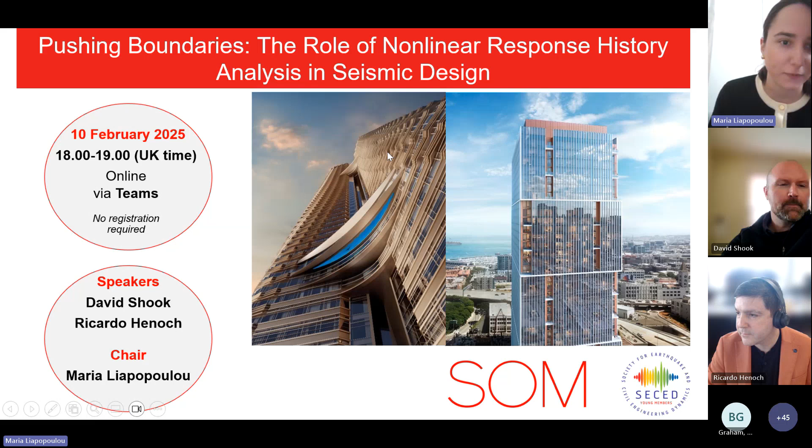Everyone. My name is Maria Liapopoulou, and today I have the pleasure of welcoming you all to our talk with the title Pushing Boundaries: The Role of Nonlinear Response History Analysis in Seismic Design. This is organized by SECED Young Member Subcommittee, and we have today two speakers, David Shook and Ricardo Henoch from SOM San Francisco office.

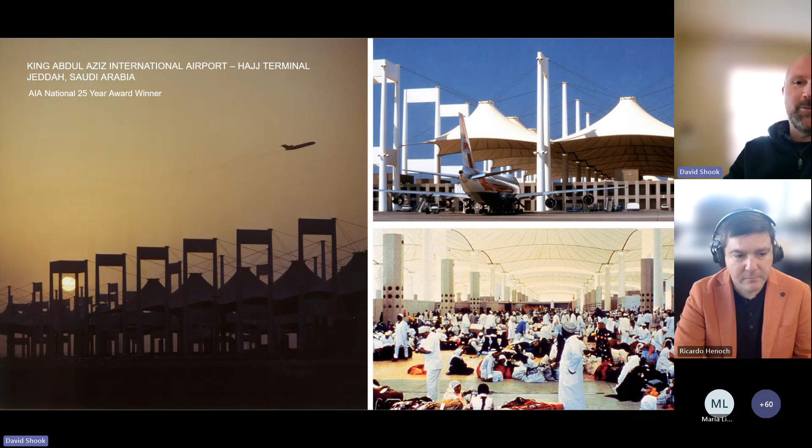This is an airport in Saudi Arabia, of course. This is another airport in San Francisco, and this is a really interesting one that was done when I started at SOM, but its ethos was still resonating within the firm. This was a project that's base isolated, so that whole beautiful international terminal you see there is not possible without base isolation. And base isolation really requires nonlinear response history analysis.

Now, when I was starting at SOM, how to do nonlinear analysis with base isolators was well established. And we were using that. And we were being creative with the structure and the design and how people interact with the design on a day-to-day basis, completely enabled through nonlinear response history analysis in a high seismic zone.

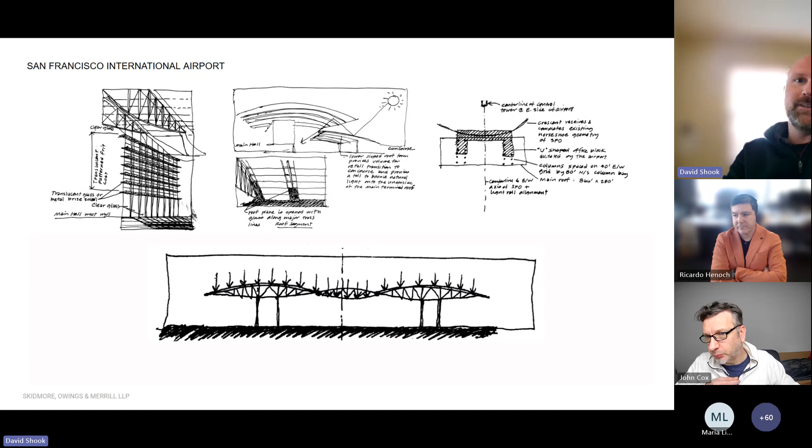Another project, and when I started at SOM, I did the very last RFI on this project. So I like to say I worked on it, even though I didn't really work on it. But it's a beautiful cathedral. It's in Oakland, super high seismic area, poor soils. And this is a very low budget project, okay? And it was going to be something totally different than this.

But we were able to incorporate, again, base isolation and enable a completely new architecture with incredibly low cost. I hate to call the building cheap because it's a beautiful building, but this is a very low cost building for the Oakland Diocese. And it was enabled through base isolation, and base isolation was and is enabled through nonlinear response history analysis.

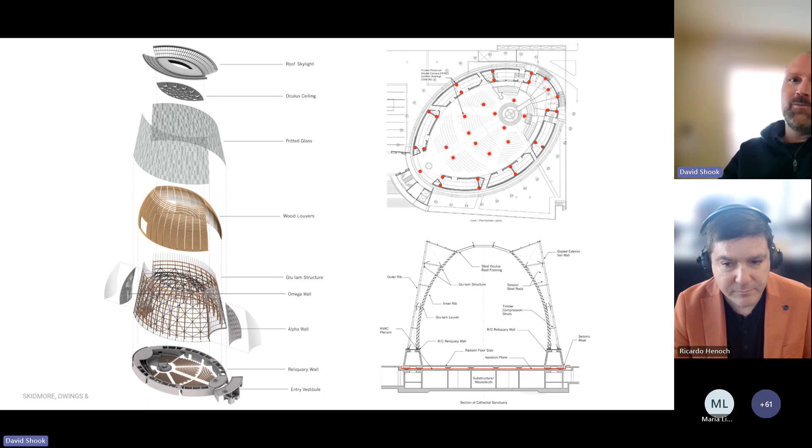So you can't do these architectures, these structures, these beautiful places. Like you can't even tell what the structure is. There's no cladding on this building. It just is. It's the materials that are very honest. So these were very well loved and celebrated within the firm, and we were expanding our creativity at the time pretty much with base isolation through nonlinear analysis. I know I've said it like 20 times.

All right. Coming a little bit more to the current. This is a building that is finished in San Francisco, but it does personify and represent very classic use of nonlinear response history analysis, especially on the West Coast. So the project is 500 Folsom. It's 43 stories.

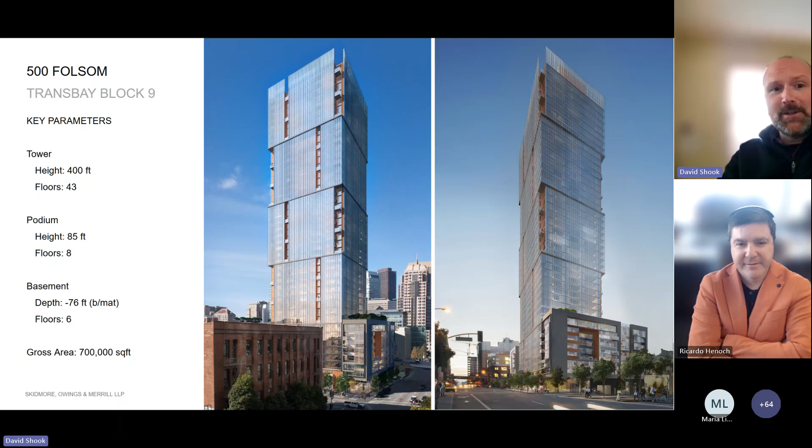I'm sorry, Ricardo and I live in the feet and inches world, but 43 stories, with a large podium, very deep basement, a pretty large building, but pretty conventional in a number of ways. The design was done in a way, and this is just good seismic design. It looks very simple, like what you're looking at on the screen. You're like, oh, it's a concrete box.

That is not easy to achieve. It takes a lot of coordination with the architects. And the best performing structures have the clearest structural concept and execution of that in the design. So this is just a concrete box all the way up and down.

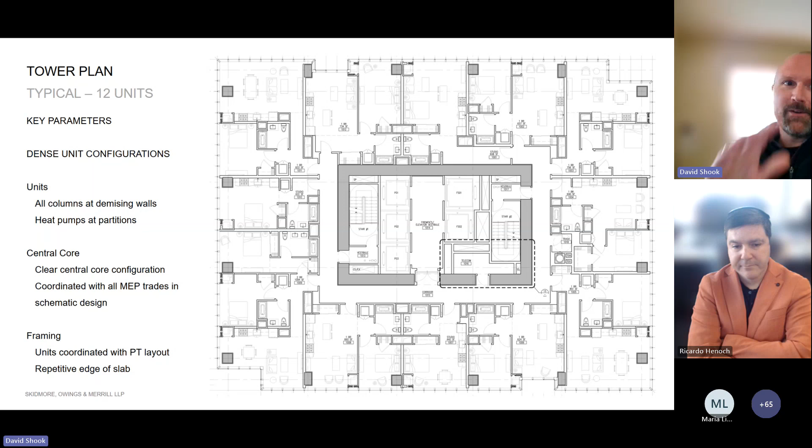Sounds very simple, but we spent a lot of time coordinating elevators, stairs, MEP, because we've got to get those doors to stack. We've got to get the pipes going in and out in the correct places. Because if they're not, they're going to be detrimental to the seismic performance of the building. It's an all concrete building, post-tension floors. Here's just kind of a diagram, kind of layers in the deep basement that goes along with it.

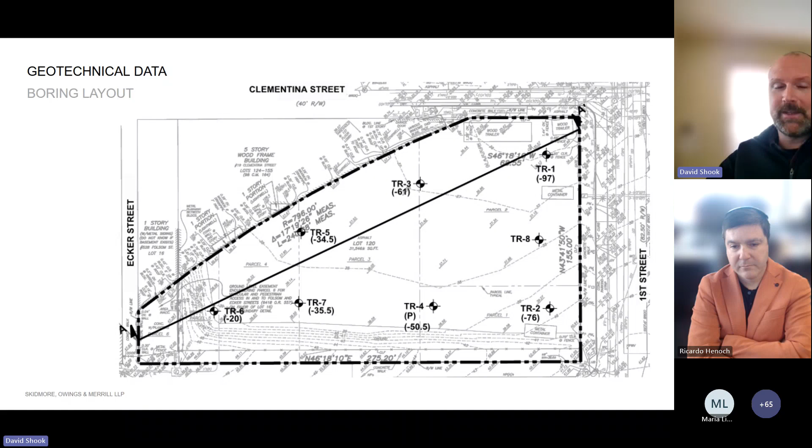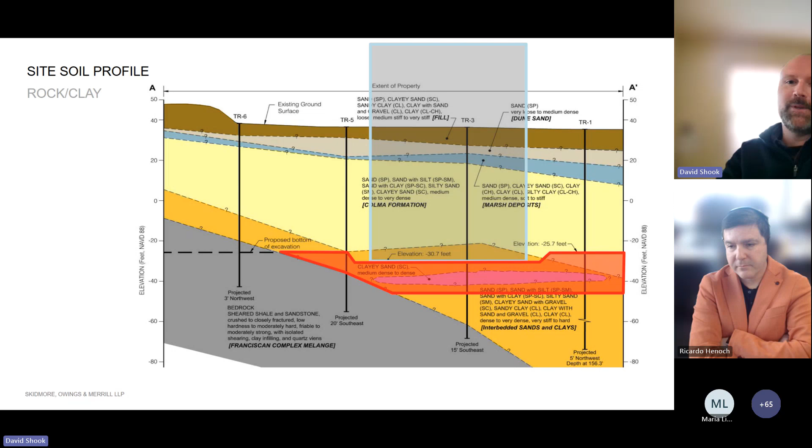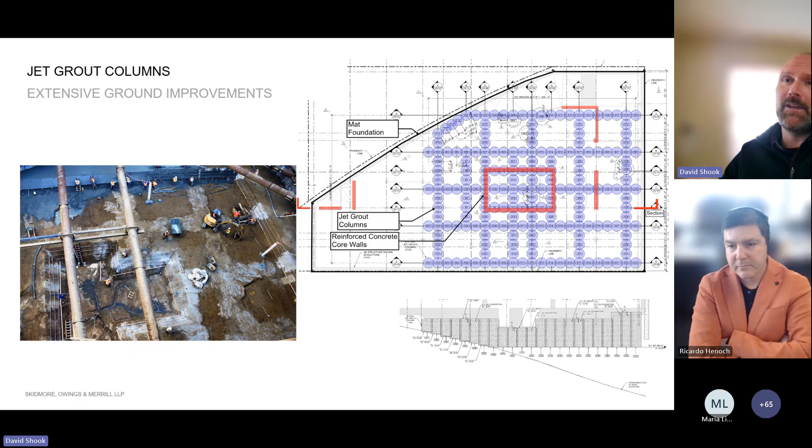So the foundation is a reinforced concrete mat. It was not done with piles. If you're wondering, we're about a block from Millennium Tower. That's a whole other thing. But we had great performance, both with the seismic analysis and then the later construction using, I think the term in the UK usually is raft foundation. We usually say mat, but a raft foundation without piles.

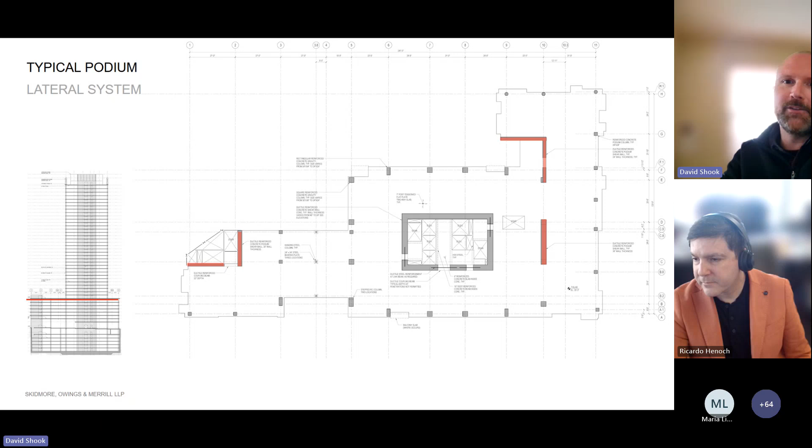So the podium, this is the podium plan. There's some additional walls in the podium to help balance torsion because those masses that are kind of sprawling out from the core cause torsion. Now, early on, we had a very slender core. You can see a different core than I was showing earlier. This was the first core represented by our architects. And I about had a conniption when I saw it because it is not an efficient core.

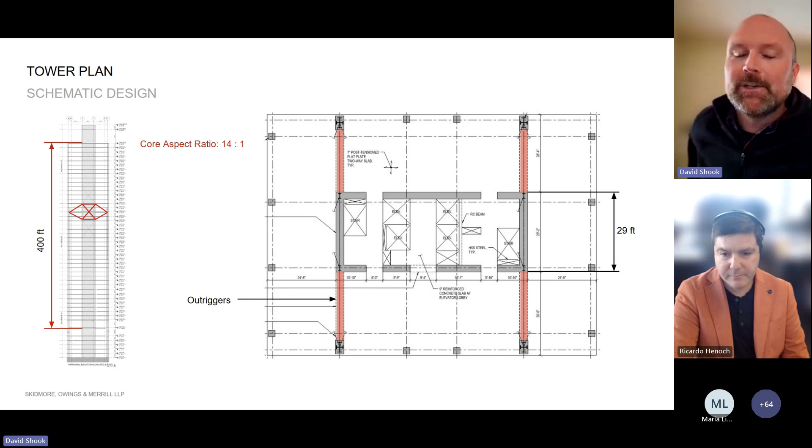It was so slender, we actually considered outriggers. And outriggers is when the core leans on the perimeter columns like you might do when you're skiing in a lateral event, wind, or earthquake. And they're kind of needed when you're like 80 plus stories. But 40-story buildings shouldn't have outriggers, for a lot of reasons. So we tried to make it as efficient as we could.

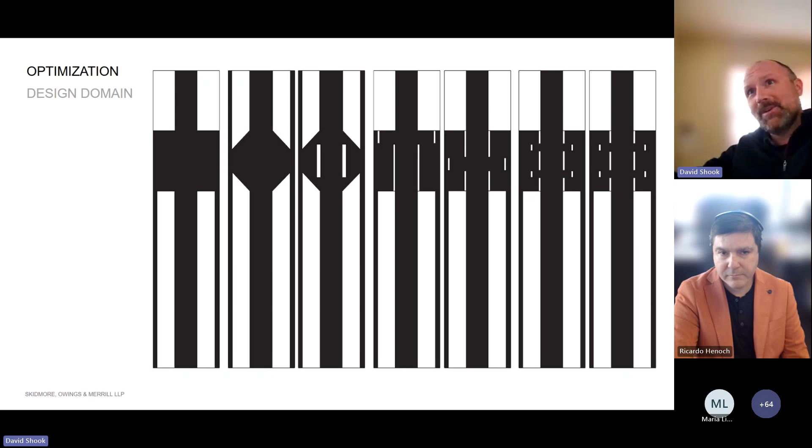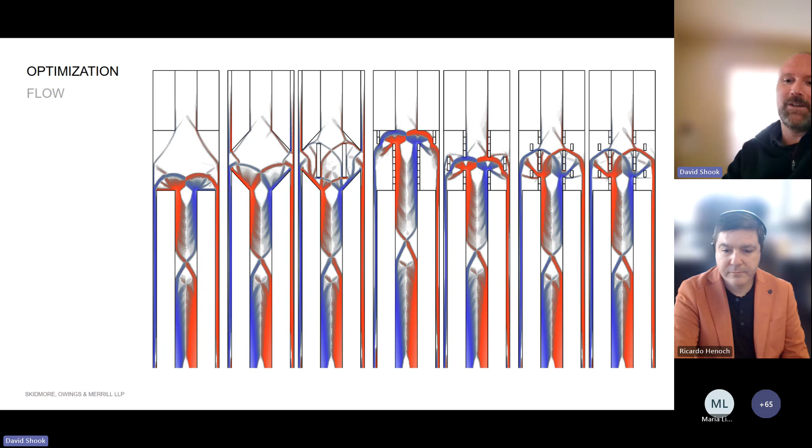This is a little bit of an aside, and then we're going to come back. We use topology optimization. This is a free software you can get. It's part of Grasshopper. There's a tool in there called TopOpt. Highly recommended. Even if you're not proficient with Grasshopper, you can figure it out in an afternoon. And the red and the blue, kind of tension and compression, tells you where the material wants to be. This is a whole other presentation, I won't get into it. It's just a tip of the hat. Use topology optimization to help you think about structures. It's a wonderful tool.

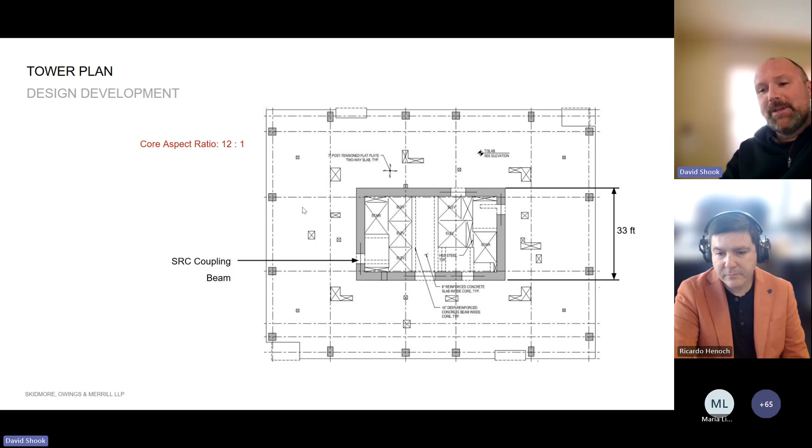Now, we went back and worked with the architects, and we made that core a little less wide, a little deeper. We got up to 33 feet. The height to the width of the core is 12 to 1, and we were able to get rid of the outriggers, which was really good. And we were able to get all of that vertical stuff, stairs, elevators, all of that into a single core with openings that stacked all the way up and down. Good seismic design, very conventional dimensions, the spans, the post-tension slab, the shear walls, all very conventional for West Coast high-rise design.

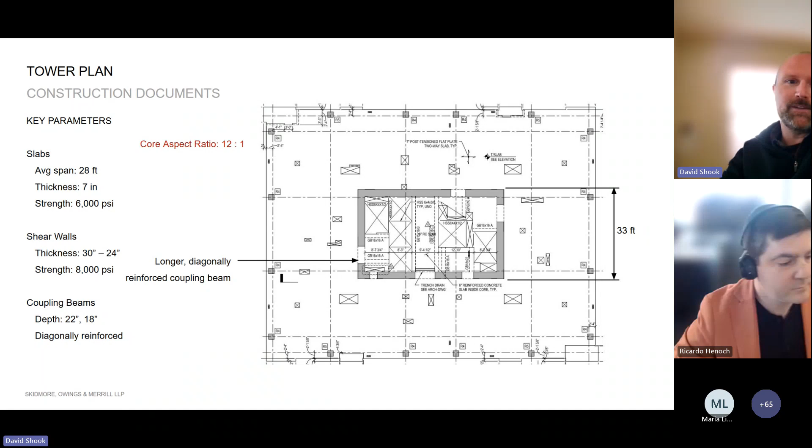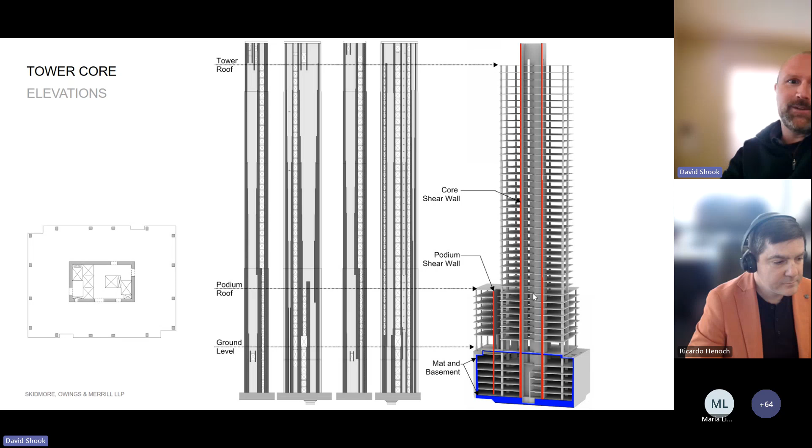So this is kind of a younger crowd here. So, you know, this is very much, if I were to give one lecture in a class, you're about to get it.

Okay. So we designed this with response spectrum, classic response spectrum. It's all linear. The first iteration is done with response spectrum, and then we went into nonlinear. And when we designed it with response spectrum, it was perfect. You could not ask for more, other than it being a little soft, a little on the soft side. Other than that, this is exactly what we want to see.

If I follow the code and do exactly what the code wants me to do, other than a moment frame, which this building has no moment frame, this is what we want to see. And frankly, if we had a moment frame, it wouldn't be any different, because in high seismic areas and tall buildings, moment frames don't do a whole lot when there's a core, of course.

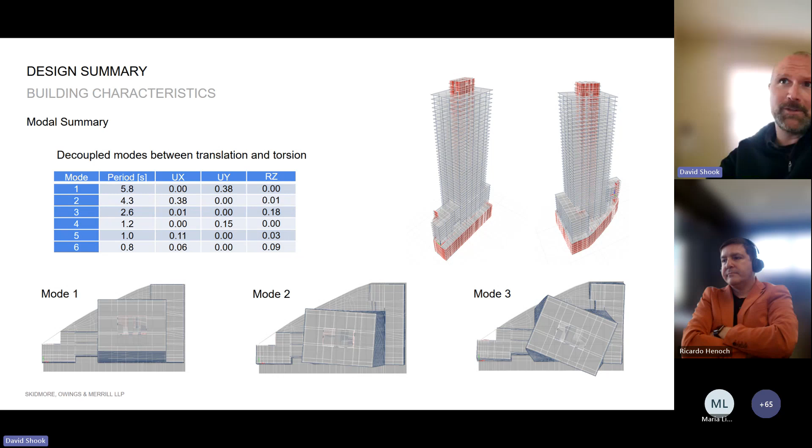So we had our periods well delineated, 5.8 seconds in the soft direction, 4.3 in the strong direction. Torsion was way down at 2.6, which is great. This is exactly the kind of behavior we want to see in modal analysis, which of course is the preamble to response spectrum, which we do as an initial run.

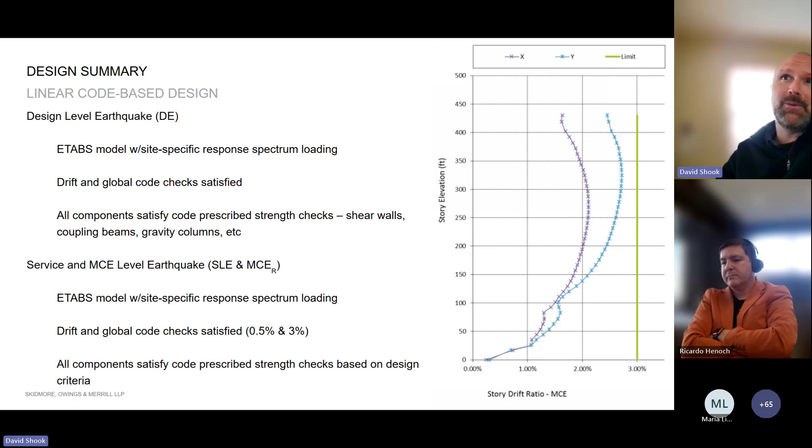So when we look at the building drifts, I'm not going to go through some of the detail on this, but when we do response spectrum in high rise, we will often use the 2,500-year earthquake. I won't go into the details of that, but it's helping us understand a few things that we wouldn't understand if we were doing the code level earthquake. Either way, the drifts were great. Torsion was good, drift was good. This building looks beautiful.

So because we only have a core, that central box, in the US building code we're supposed to have a perimeter moment frame, but they're expensive. They don't do a whole lot. So you almost never see them on the West Coast anymore in a high-rise building. It's part of what's called a dual system in the US code, and it's in a lot of codes. I'm pretty sure it's in the Eurocodes as well.

And the concept is, well, we don't really know what the core is going to do, so we're going to put a moment frame in just in case. That's why it's there. It's a backup plan, right? It's all these beams and all this detailing and all this material as a backup plan.

So in the US over the past 20 years, we have done more analysis in our designs than required by code. Code requires response spectrum. We're doing nonlinear response history analysis, and we're having a peer review panel. And because of those two things, it's become standard to remove that moment frame, which was belt and suspenders anyways, and then really understand what this core is doing. We're going to model the nonlinear behavior of this core.

When I say nonlinear, yes, we're doing P-delta. Yes, we're doing nonlinear soil springs. I'm not talking about that. I'm talking about the nonlinear material behavior of the steel and the concrete. The steel and the concrete in that core, we are going to model with representative elements.

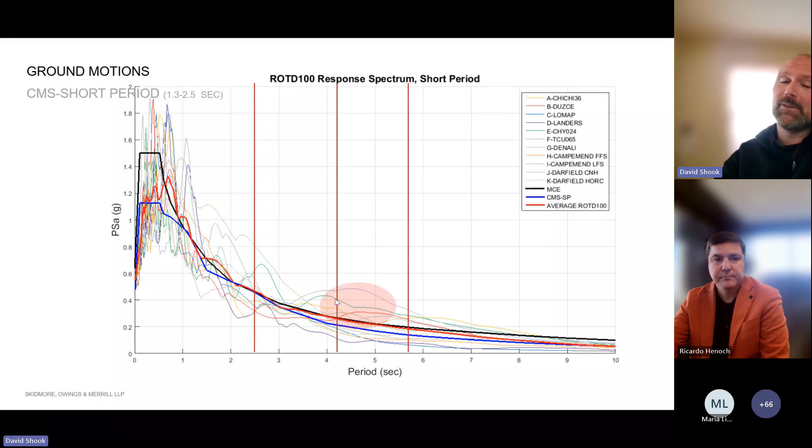So one area that we had some difficulty with, and you'll see in a minute, is we had a couple of ground motions that were pretty high, very representative of the site, and I would say the top seismologist in California, Norm Abrahamson, agreed these are appropriate ground motions for the site. They're very, very high. In fact, the code spectra would be down here, and those ground motions are way up there, and pretty close to one of the resonant periods of the building, which is quite difficult, right?

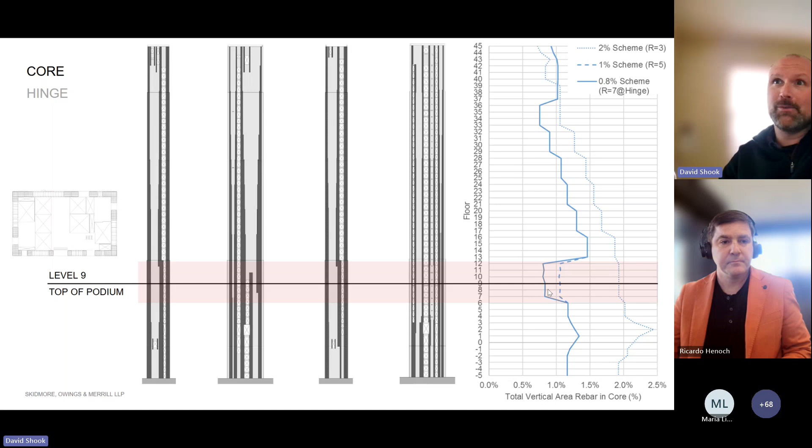And as you'll see in a minute, we actually had some really bad behavior. We actually reduced the rebar significantly over the height of the building and improved the performance. I'll show a little bit more of that in a minute. And we actually isolated an area for a hinge to occur. And a hinge is when we reduce the rebar notably from the areas above and below to focus nonlinear behavior in a particular area.

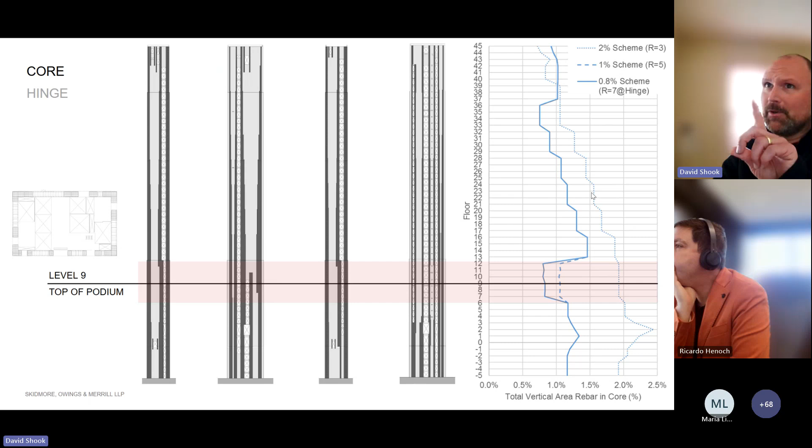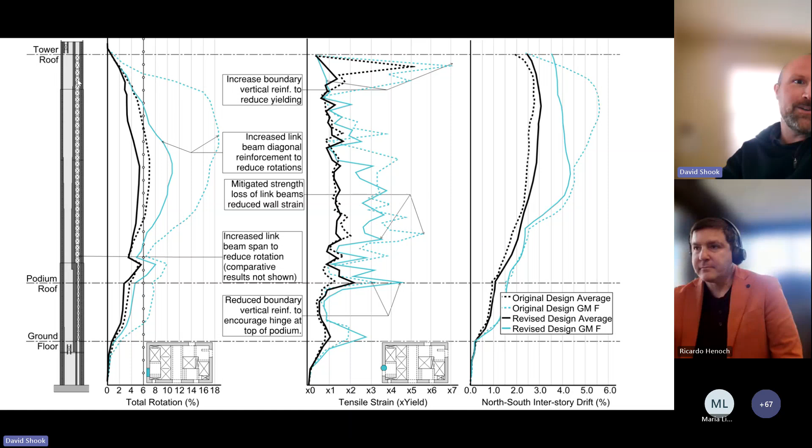Okay, and this is a code-based design, right? That moment frame isn't going to do anything, believe me. Okay, I know there's no moment frame, but that's the only thing that is taking exception to the code. This coupling beam isn't just one, all of these are done. This is a totally unacceptable response, and it's a code-based design with a realistic earthquake on it, okay?

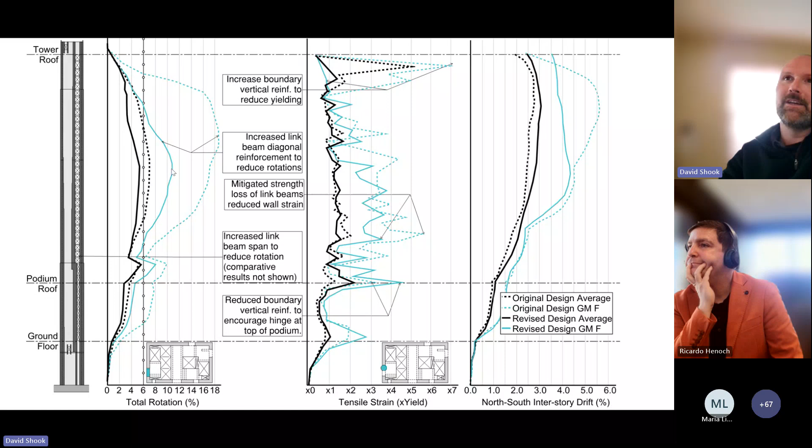We reduced the rebar in the shear wall. We actually increased it in the coupling beams, and we saw a dramatic reduction in rotation because the energy dissipation was increased. This is a little bit of what a boundary zone looks like. And we actually came up with some criteria to map the tension and compression strains to the shear walls. And we actually did this just on our own. We were super interested in this.

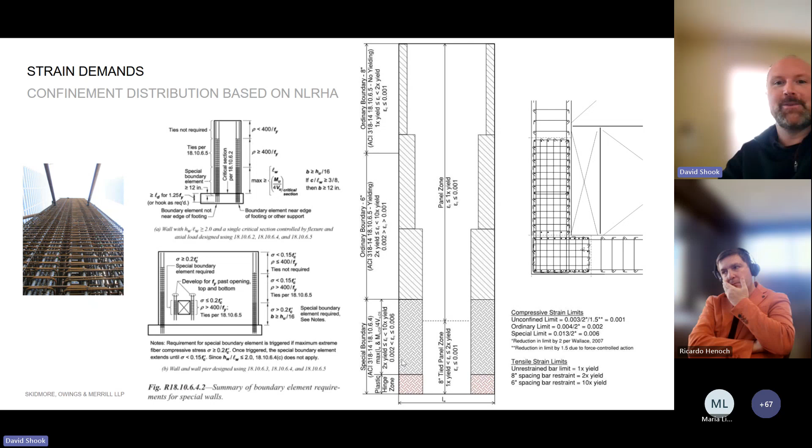And when we presented it to the peer review panel, we didn't know it at the time, but there was a group out there actually going to propose this to go into LA tall buildings and eventually ACI. And we actually matched very closely with them, which was great to see.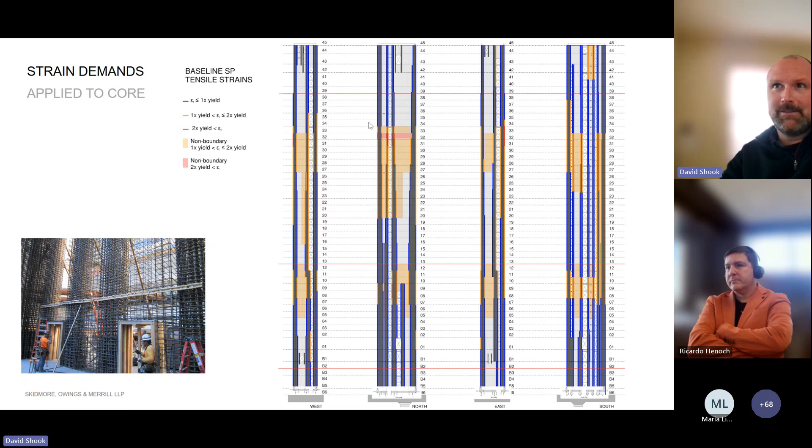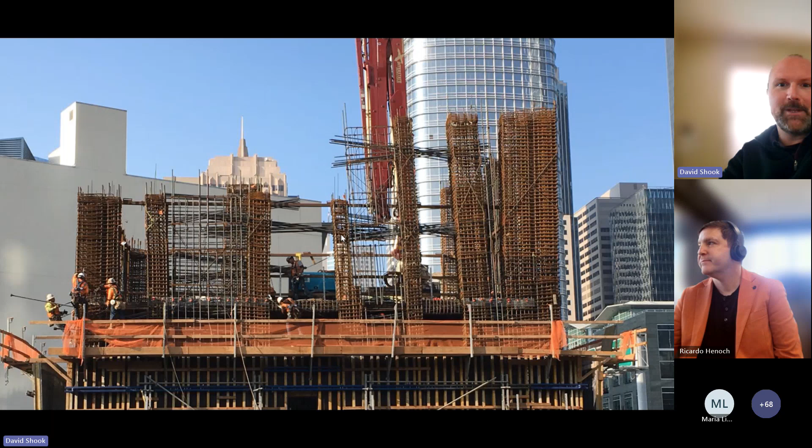Okay, Ricardo, do you want to share your screen to do your part? Okay, I'm going to stop sharing then. All right. Let me know if you see my screen. We should have time for a few questions at the end. Yeah. So do you see my screen? Yes. Okay. Yeah, we can see it.

So we'll move to a completely different zone in the world where projects in scale are quite large, very fast-paced, and where decision makers, when you're proposing something that's different, need the right amount of information in order to move forward. So this project is in Suzhou. Suzhou is a city close to Shanghai, inland to the west of Shanghai. And it's a very beautiful city surrounded by canals and lakes, and it has an awesome view. So the owner wanted to create something very unique. It's a 460-meter tall building in this water city, so they want views.

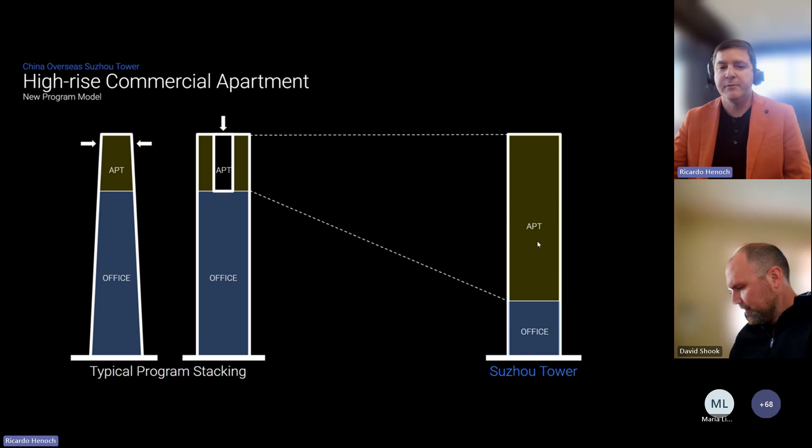And in the past, we've done several typologies of mixed use where the tall building has office use and apartment use, or sometimes even a hotel. But this building was very unique because the ratio of those different usages changed dramatically. And now they wanted something that's more common nowadays. I see many projects where the residential part takes priority over the retail or office area. And that's what Suzhou was all about, like 80% apartment, 20% office space.

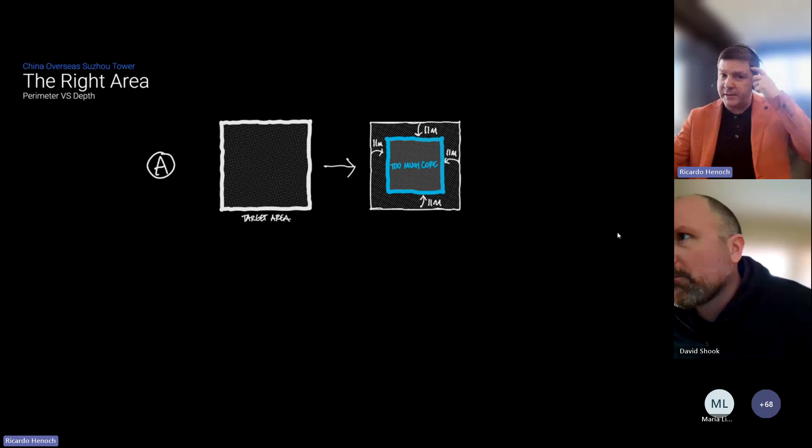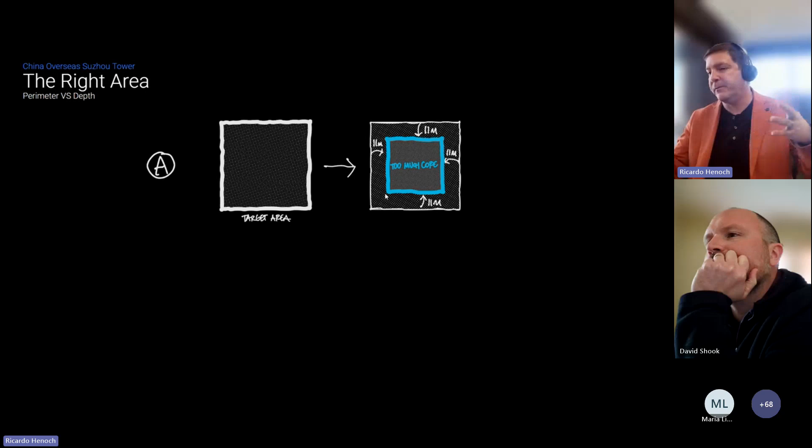But that creates a constraint in the planning of the core and the area of the project. So when you have a residential tower, you have a target area, and you can only have a certain amount of depth before your apartment becomes a very dark environment. And if you offset that from your target area, you get too much core. It's not effective.

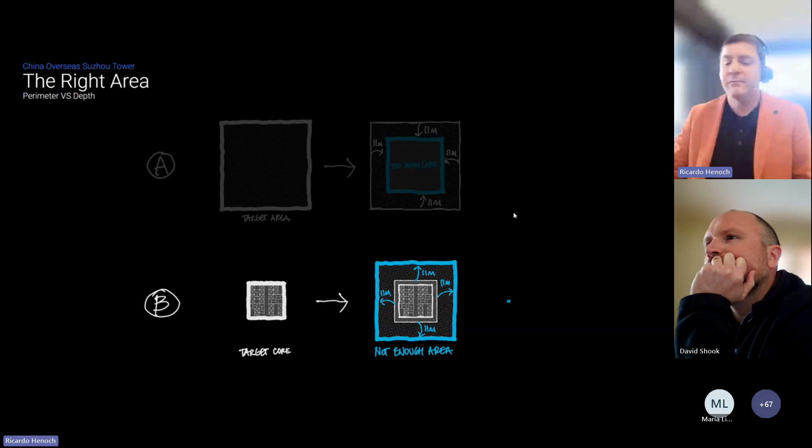But if you do the opposite, you start with an efficient core like David showed, a very efficient core that's taking everything, and you offset the required amount to create the residential space, well, we don't have enough area for what the client wants. So that's kind of the conundrum that we have. We want both, but in different ways.

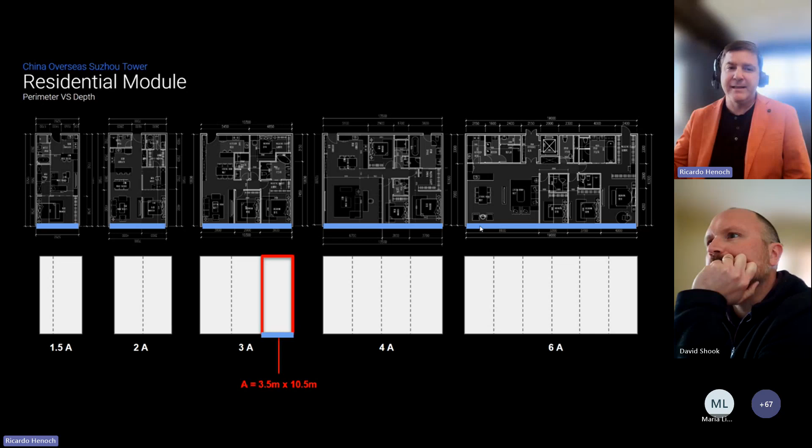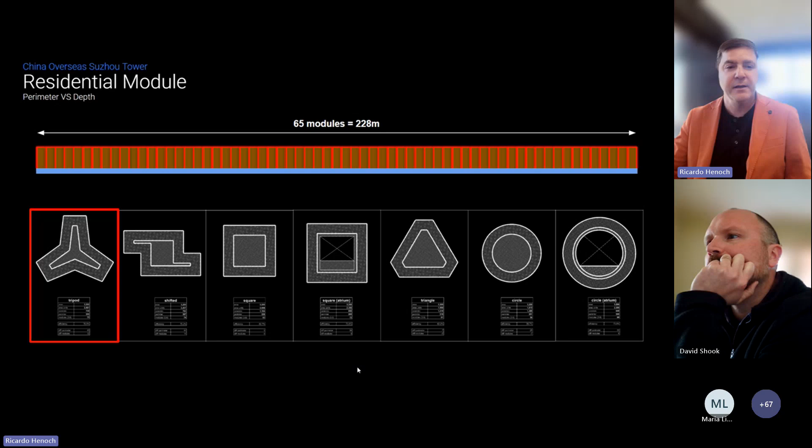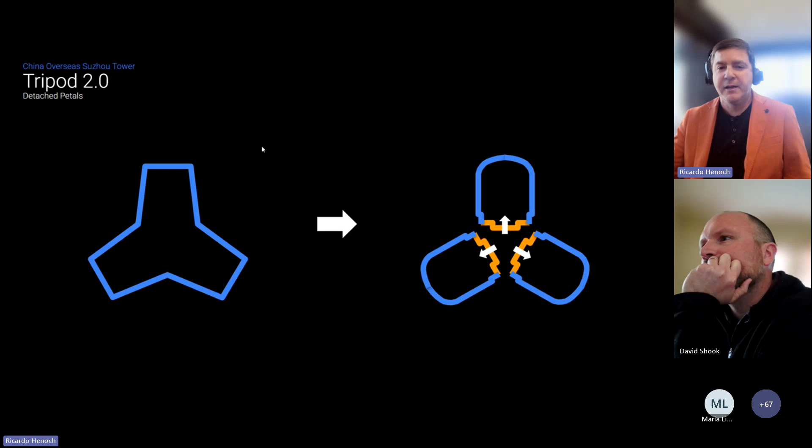So the provocation started with the architects highlighting this challenge and creating a parametric investigation on what was the most effective perimeter to meet this demand. And with that perimeter, we quickly reached a solution that we're quite familiar with from other taller buildings, which is a tripod. The tripod allows us to have higher perimeter and also a core that could be effective. But this project wanted to be different, so we created a tripod 2.0, where the petals get detached in certain key elements to serve the different programmatic needs.

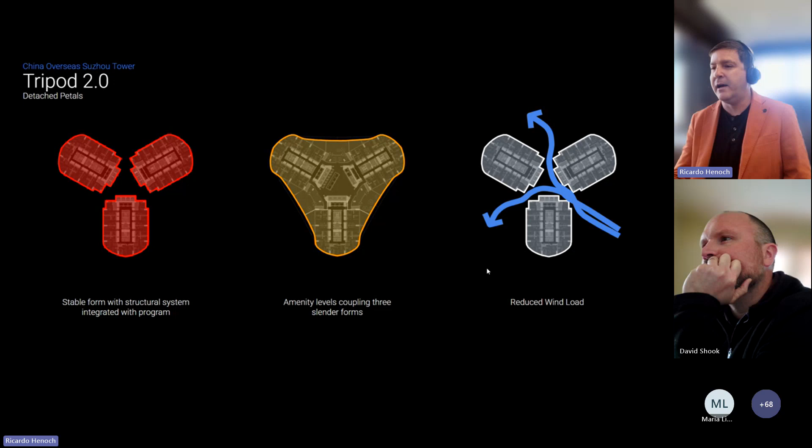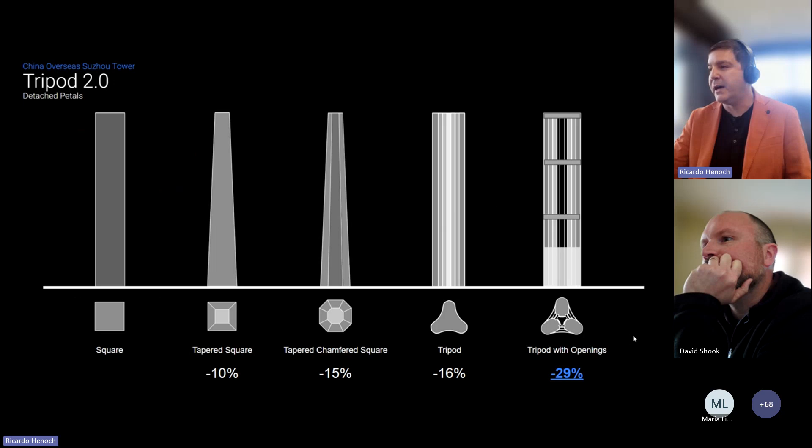So the shape form on the very top is where most of the programming is residential. Then we have amenity areas where we connect each one of the petals. Having this open area allows us to reduce the wind load of the structure very dramatically. Our preliminary analysis of this shape showed that we could reduce the wind loads by 29% just because of this opening. So that was quite significant for this tower.

In the end, the main idea of this building was to utilize simple structural systems connected together to be able to match the design intent. In the central part, a reinforced concrete core that tracks along the height, and several coupling trusses that connect each one of these petals together to act as one.

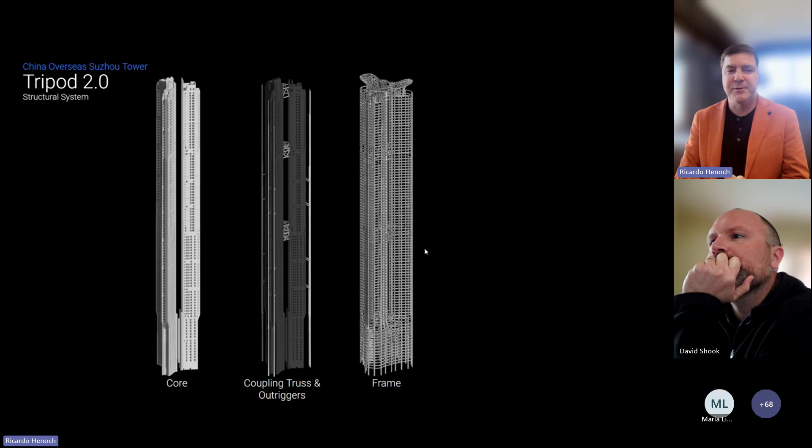A moment frame: unlike what David just expressed about the avenue or exit path that we have here in the US for getting away from a dual system, in the Chinese code, even though we go through a similar process, it's not called peer review, it's an expert panel review where several experts review our work. They don't allow us to deviate significantly from the code, and we are kind of forced to use a dual system. So therefore, a moment frame is required through the height of the tower.

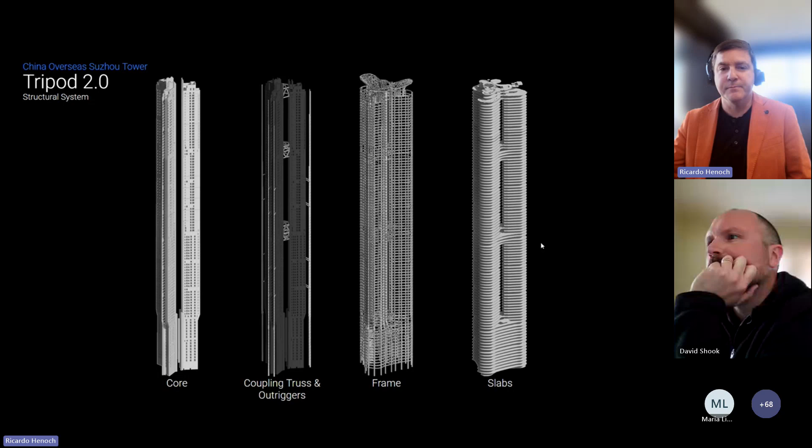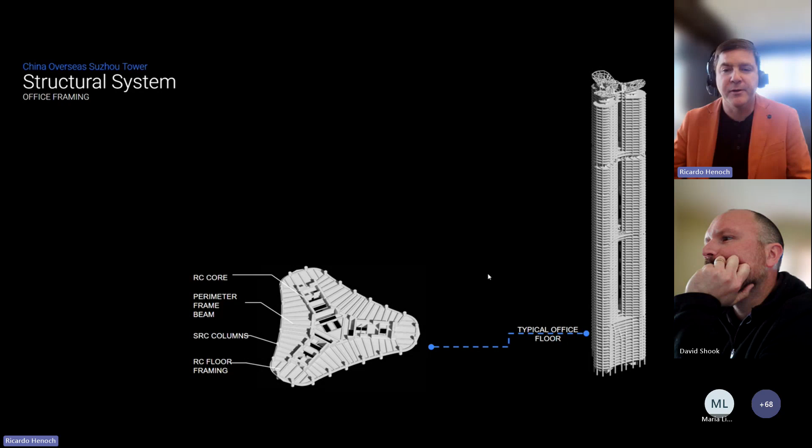And we have different typologies of slab throughout to provide the service, and that creates the overall system of this particular project. The idea is that we utilize the materials in a very systematic and cost-effective way, where the heaviest ones are used on the base and the lighter ones on the top. So we start with an RC system on the bottom for the office plan, and then we try to align the framing layouts with the partition layouts of the proposed tenant in those areas.

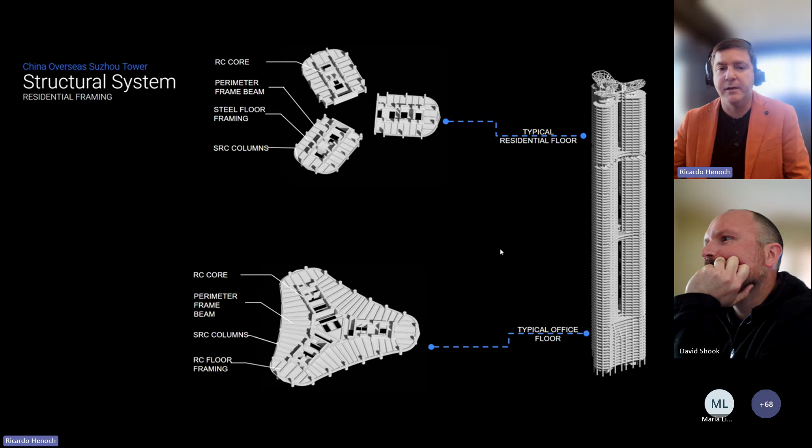And then on the residential areas, we have metal deck and steel systems that are also deeply coordinated with the programmatic residential units that we have on the top. And in the amenity zones, we have a lot of composite systems because we need stronger diaphragms to connect and couple together these towers. Each tower on its own could not resist the lateral forces in theory, but connected they behave much better.

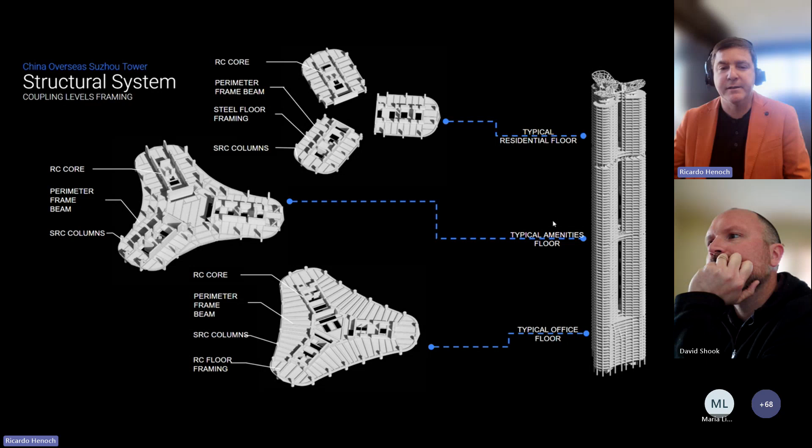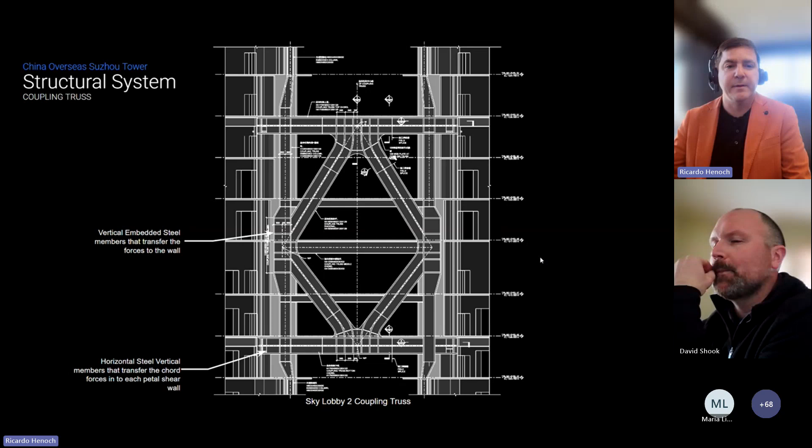So in our case, given that we're a tripod, we believe that the building's response spectrum was behaving pretty well. We have pure translational modes in the first and second period, and rotational in the third. But all our petals are inclined at different angles, so we had to do different studies of how analyzing it at different angles changed the results we were getting.

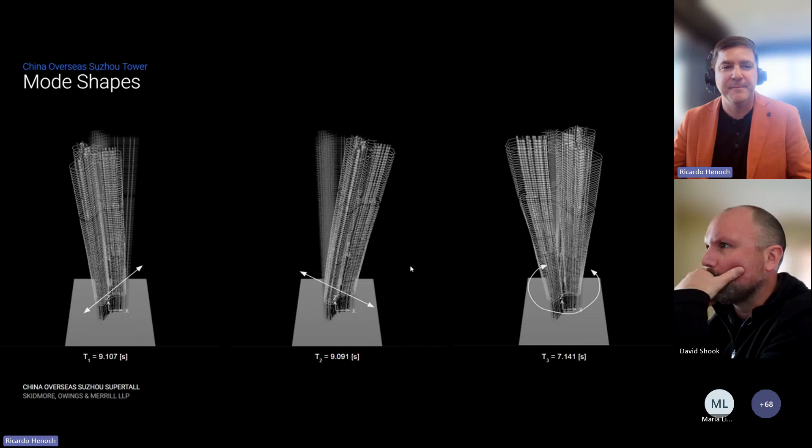I was talking a little bit about this before, but we don't have a peer review panel. We have an expert panel review, which is a different word for something fairly similar. You have a series of experts that aim to align the expectations of these very peculiar building design objectives, what we need to reach, and what is a good agreement so the client gets what they want, and the experts and we are in alignment on the results we're getting from the project. In this particular case, the building was designed with 7 ground motions.

Here I'm highlighting only 6, but we use a total of 7. 3 of those are artificially generated, and 4 of those are natural waves from their library. You can see here their code spectra for frequent earthquake versus the spectra for similar level on all the different ground motions and on our target periods.

One nice thing about the Chinese code is that the requirements for performance for a specific ground motion level are very clear. The only negotiation that now needs to take place with the parties is where do we want to apply that? Are we over applying a certain performance range into the height of the building? And it's a very collaborative experience with the expert panel.

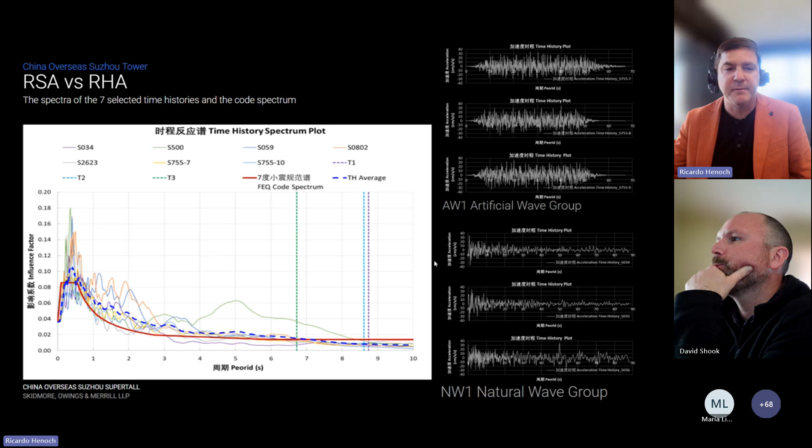The ground motions need to meet certain minimum requirements to match the code level spectrum. And you can see from the distribution here for the different ground motions that some of them go slightly above or below the response spectrum values. Drift-wise, we are lucky to have a very well-behaved building for seismic and for wind, but we still need to make sure that it meets all the criteria for the different ground motions.

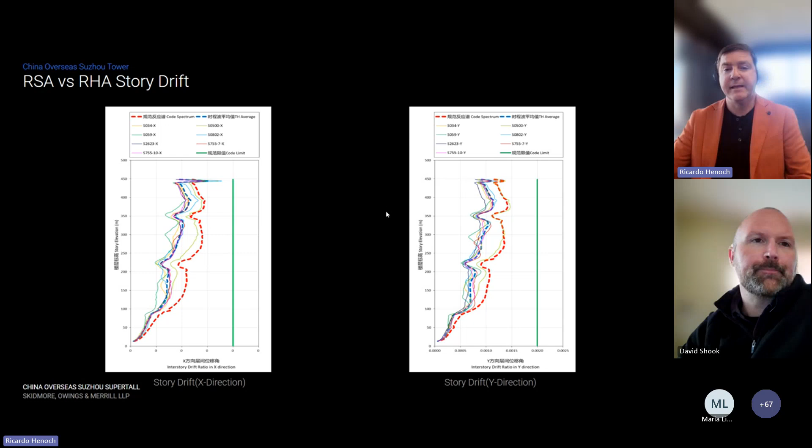And I will talk later about another driving criteria that makes this building what you might call stiffer than usual, because you see a large gap here between the target drift versus the results on different time histories. It is the acceleration criteria for the residential units that end up driving what we really need to have in this building.

The elastoplastic model that we built for this project was performed using ETABS in lieu of Perform, where we had fibers and hinges for coupling beams, and where we test them for the different levels of frequent, moderate, and extreme level earthquake, in order to check the different criteria for coupling beams and shear walls.

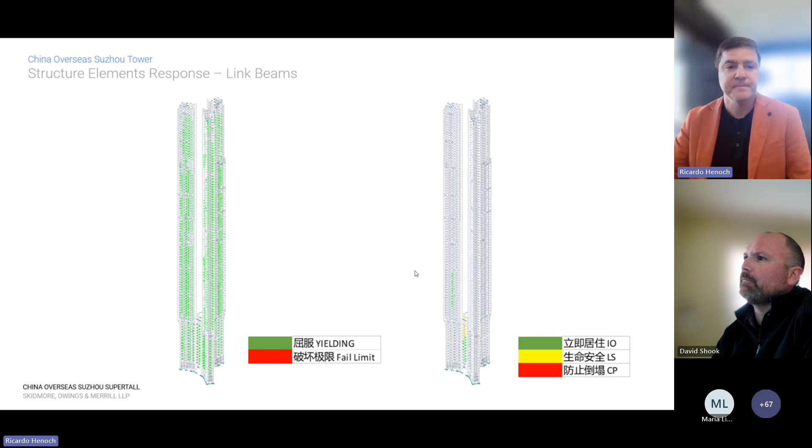And as David said, it's good to see how you can start tuning up the system as you validate and go through the checkups of the ground motions in order to focus in the areas that really need to connect the building and provide also the additional level of performance for those extreme events.

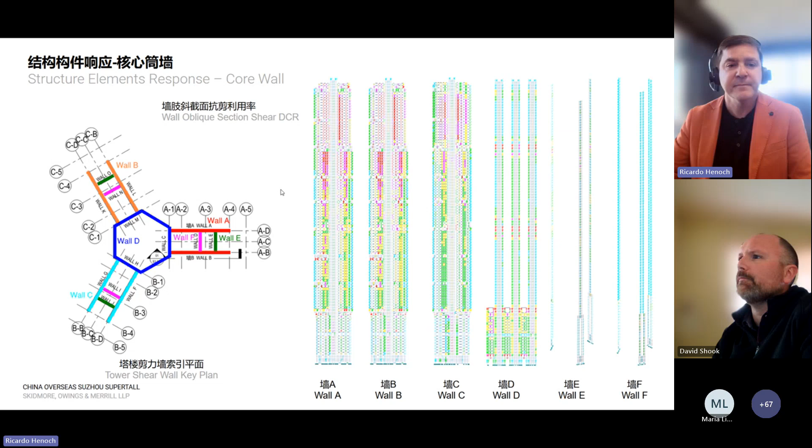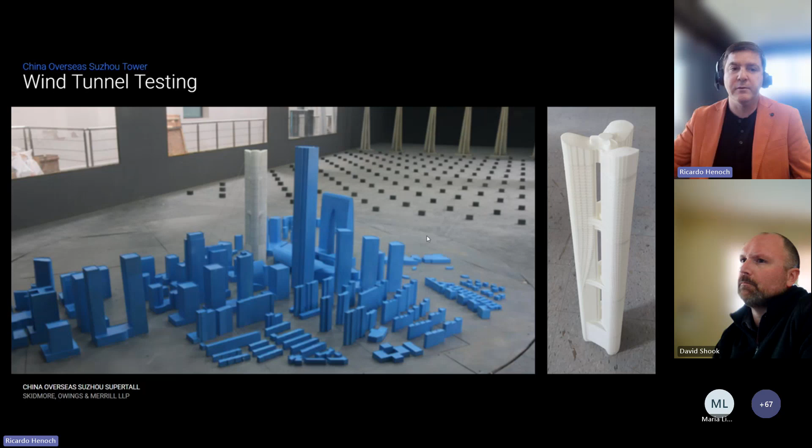But then the wind tunnel testing consultant in China created their much more detailed model to test this, and also included the different future and current elements that impact the behavior of the tower. But we got very good results. The code only allows us to reduce the code level wind to 80% of the code level. So we were able to meet and exceed that with the current geometrical configuration.

The interesting part is through the wind tunnel consultant interaction, we were able to obtain time histories for each one of the diaphragms of this tower. That was the main concern. What will the residential unit experience? What are the users going to experience? And so there was a lot of focus on trying to get as much information on that.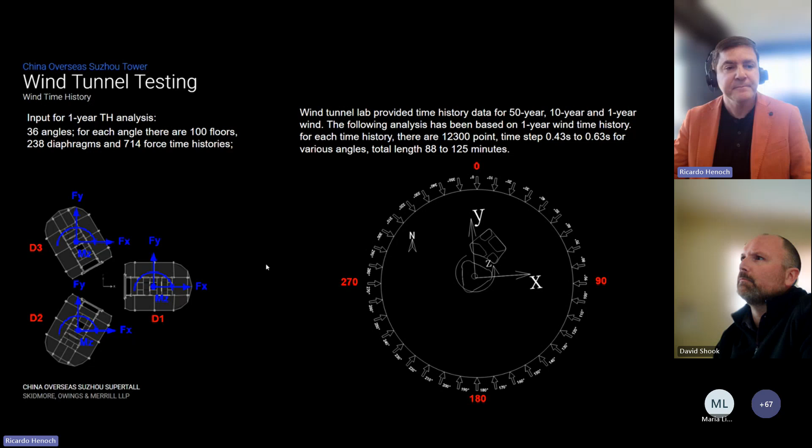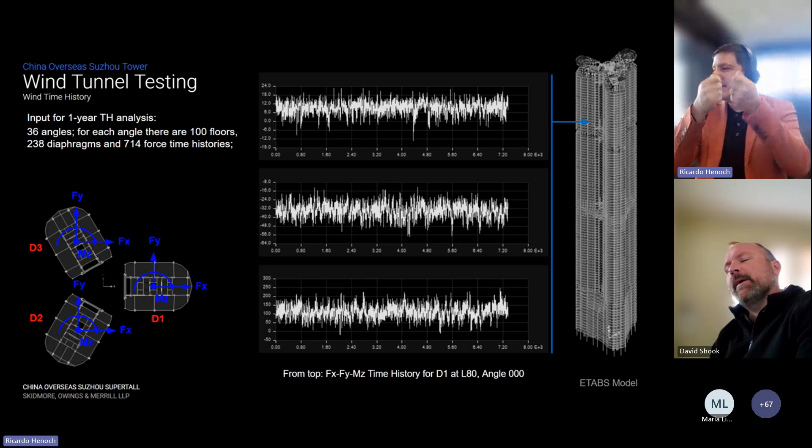So we had 714 time histories applied to each one of the diaphragms. The integration of these was quite challenging, even more so than the seismic one. However, we are in a different range of behavior of the model, where here we're not moving into nonlinear yielding of elements. We're more into acceleration, displacement. It's more about what do you experience? What's the serviceability of the building? So the runtimes are quite different from the nonlinear ground motions that we run.

And here's a couple of the results and the information extracted, where we try to capture, of course, the extreme areas of the petal, how much acceleration do we feel, and are we within the limits that the client has established that we need to meet.

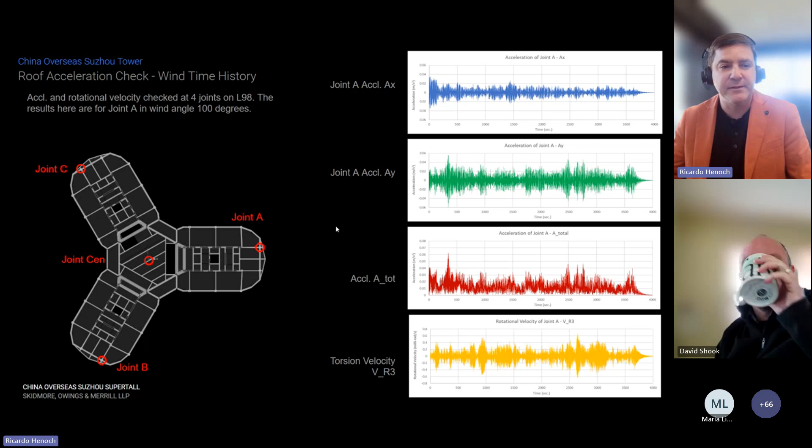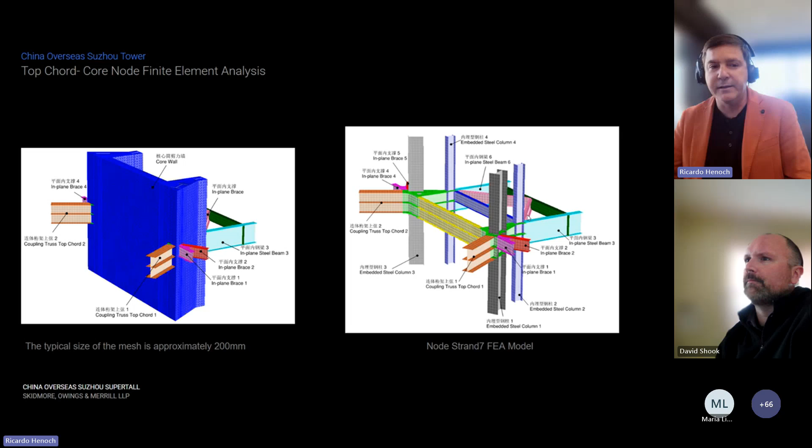Lastly, once we have all this information from the seismic, wind, gravity, and construction sequence, we have a heavy focus on these coupling trusses that are connecting the tower and are key for the behavior of the structure as a unit. So separate models were created using Strand7, where we model the steel with their detailing, concrete surrounding, and rebar to understand the interactions of these elements and how they will behave under upper and lower bounds of forces extracted from the prior information.

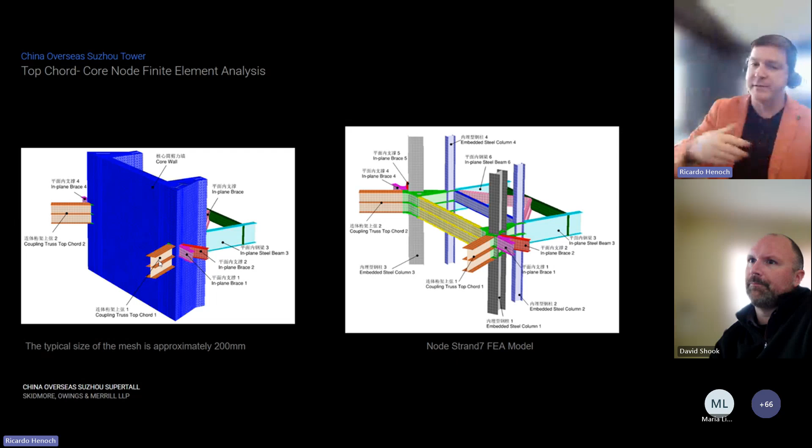And it's a great place to be when you can confirm, for different extreme level events or frequent level events, what is the different behavior of the building, and make decisions out of it of how we need to thicken or detail in a different manner these nodal regions.

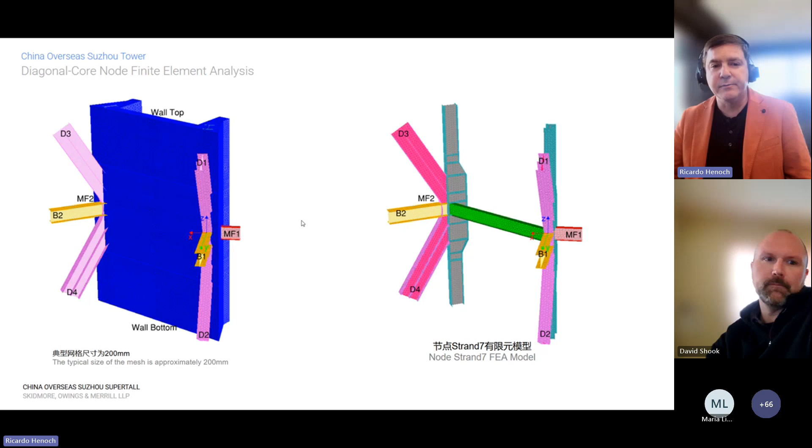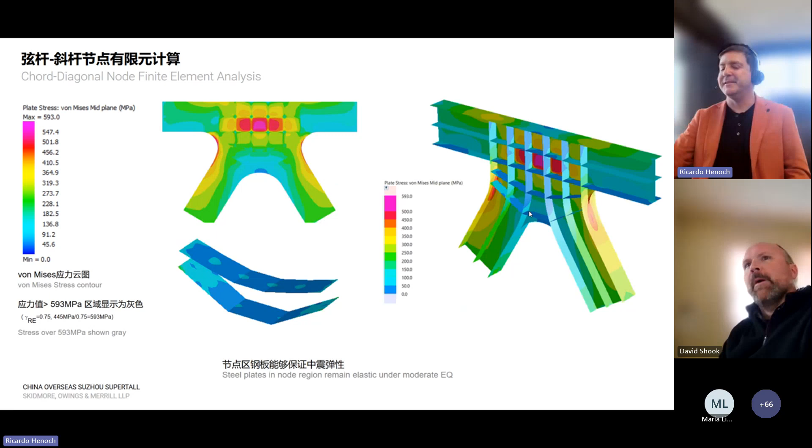And you can check not only the concrete behavior as the previous one, but also the steel areas. We not only check that particular top chord connection, we also check the diagonal ones, and with good results. And then the central pieces that are aimed to be expressed as a celebration of the structure rather than just a brace coming into the way of the architecture, as you will see later.

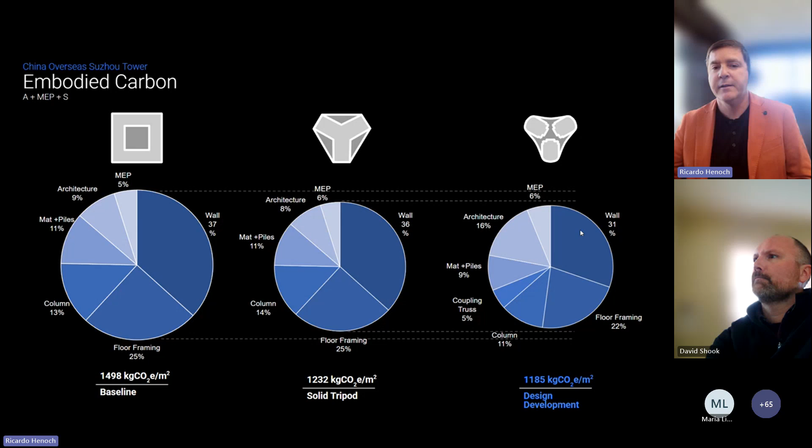Through all this design process, another thing that we kept in the back of our mind is how the evolution of the system and the design decisions that we're tracking through time influence the carbon footprint that the tower has. And this was instrumental internally as our driver, because it's different when you quantify the carbon footprint of a tall tower, and then that carbon footprint per square meter gets distributed among a number of users that's quite large, so it becomes very efficient. So the more efficient you make this tall tower, the more efficient it will be in carbon footprint for the users in the future.

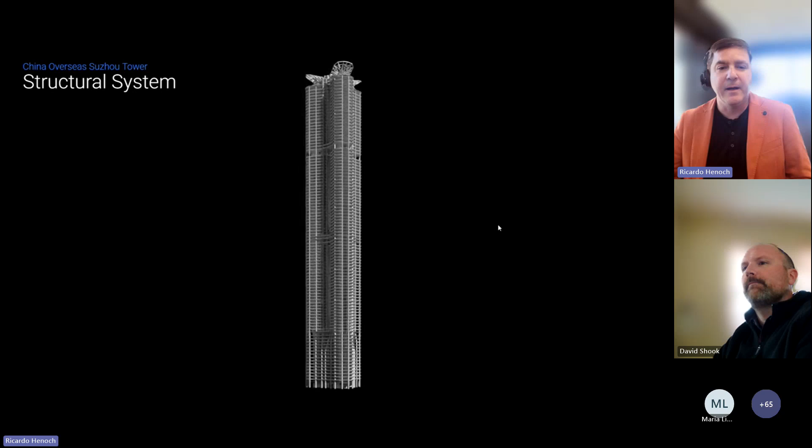So the end result of this structural system was quite unique for its future. These separated petals working as one with these pretty big coupling trusses. It has other features that we can dive deeper into, but time doesn't allow. But I want to show you a couple of pictures of what the project wants to be. Right now, I didn't go deep into the foundation, but we have a pile foundation system, and that's in progress. But the project is quite unique, located in front of the lake, with awesome views.

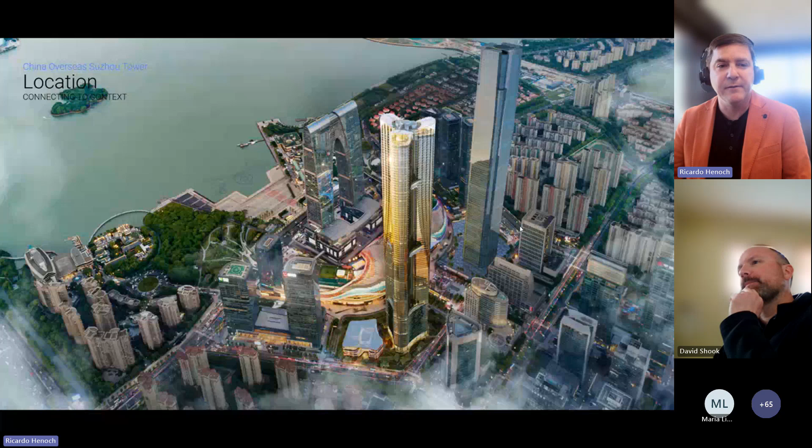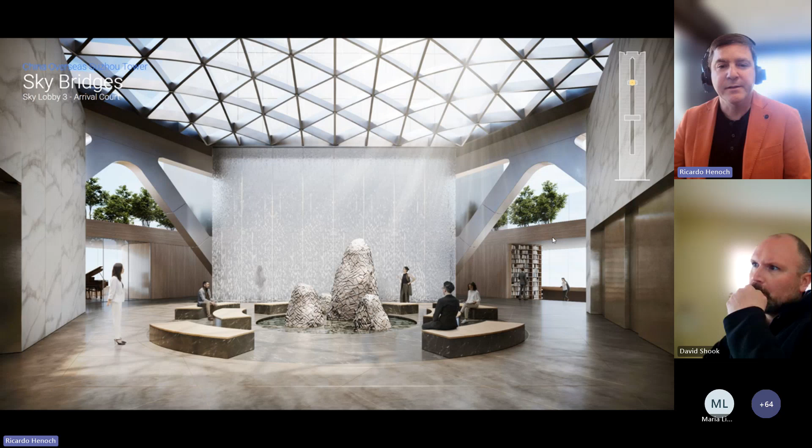And here you can see how we're trying to celebrate the diagonal coupling truss as part of the amenity space for the project. And each one of the different typologies of coupling truss aims to do that, to be part of the architecture and connecting these petals with the rest of the usage of the project.

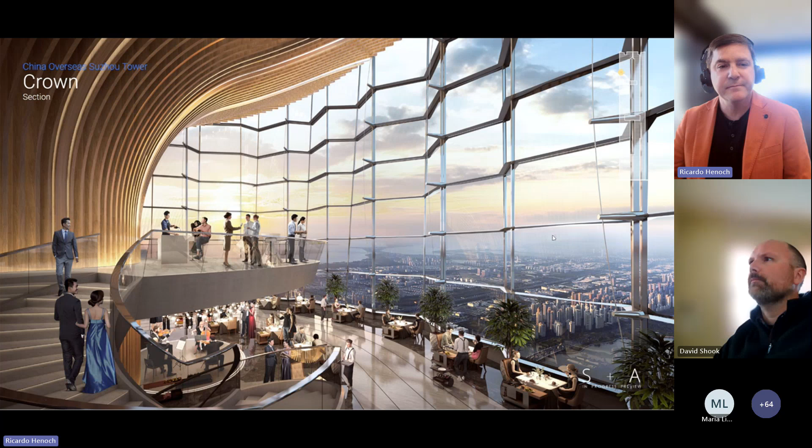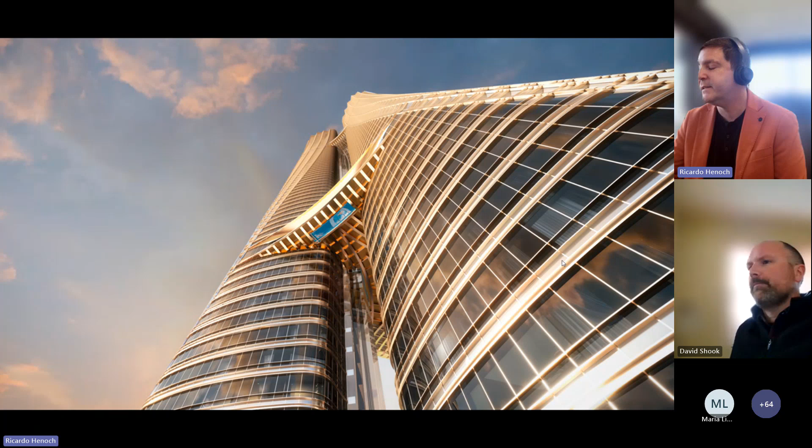The crown has been a challenge on its own, and I think we're finalizing the CD package, so we're quite happy with it. But this is a different take on pushing the boundaries, where the seismic and wind components of the analytical work aim to make the design decisions that we're putting forward more effective, and also tell a deeper story that wants to be fairly unique.